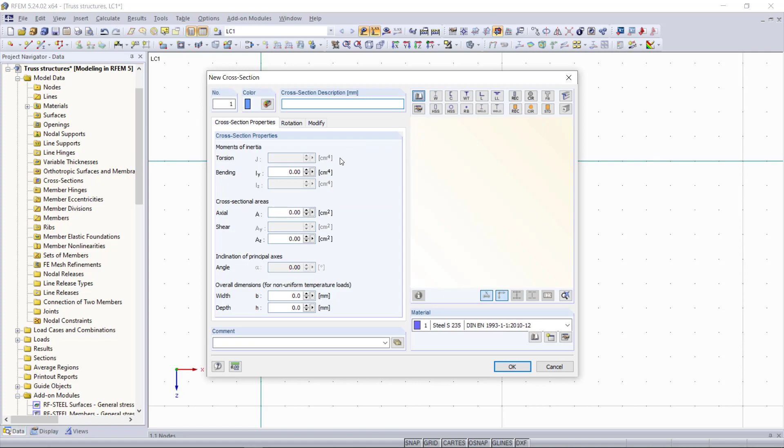So we will begin with modeling the first truss with individual members graphically. The first step will be defining a new cross-section and material. Let's say we choose this time an IPE 80 and as material steel S235. Then, as usual, we will set a new member and start modeling our truss graphically.

So before we do that, I'd like to have a look at the member type to explain how a truss member is defined in our programs, RFEM and RSTAB. In one of our previous tutorials, I've shortly explained it. So until now, we mostly used the beam as member type, which transfers all internal forces. It's a fully fixed member without any member hinges, and this is still what we need for the upper and lower chords of our truss.

Then we have several other options for member types, and we can find a truss here. A truss is defined as a beam member, but with automatically applied moment releases. So a truss is a beam with member hinges on its member ends. And this is great for all of the internal members within our truss, like the diagonals, because we don't have to define member hinges manually on each member end anymore.

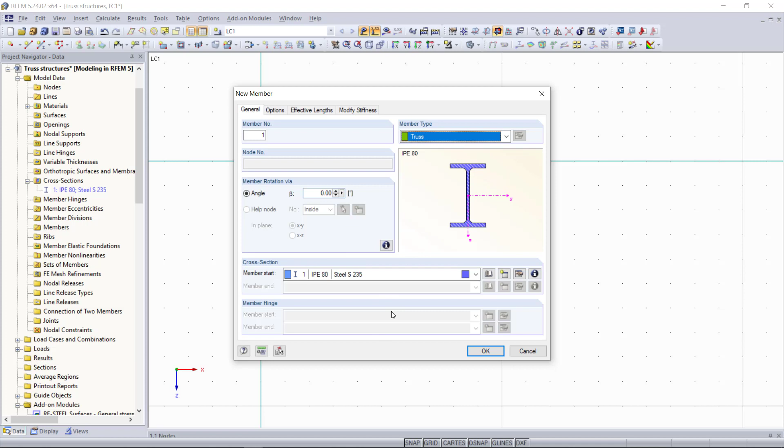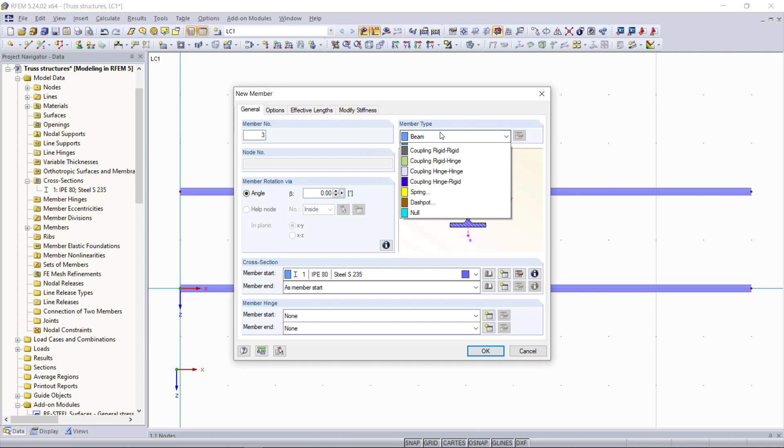But first, we will begin with the upper and lower chords with the standard beam member. So our truss will have a total length of 6 meters and a height of 1 meter. And now for all the remaining members, including the diagonals, we will select new single member up here again, and then we change the member type to a truss member. We will insert in total 6 diagonals, beginning in the middle with a distance of 1 meter in between. First this side and then the other side.

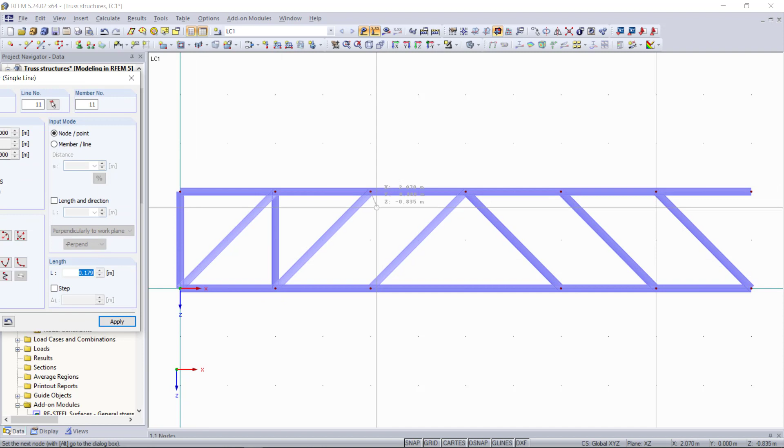Once done, next we need our 2 supports. We will have a hinged one at the start point, and the one at the end will be able to slide along the X direction. Now, as we can see, our truss structure is finished, and we can start with our second example, which will be generating a truss automatically using the model generator.

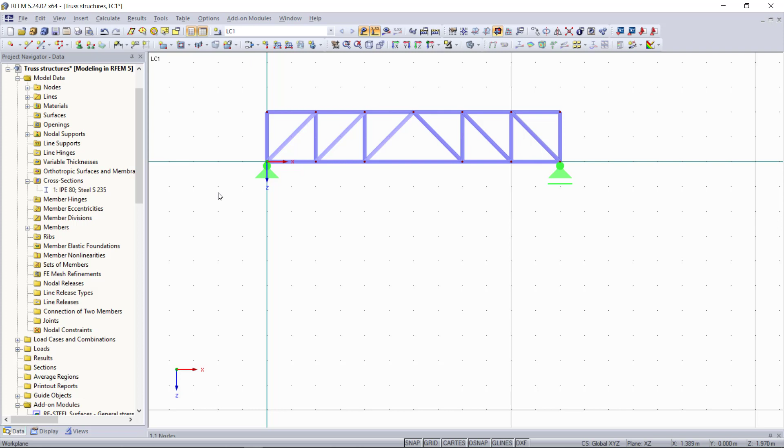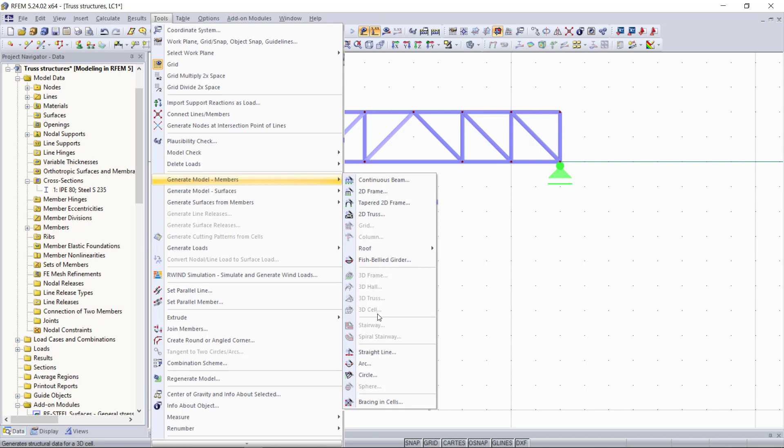First, we will create a new node, and this node will be the starting node of the truss later. Then, in order to generate any structure, we can go up here to Tools, and then we can find Generate Model Members. We can see that some of them are grayed out. This is because we are still in a 2D environment. That doesn't matter for our example, because we will choose the option 2D truss here.

Next, this dialog appears, and in this dialog we can select different truss types, we can set different directions for the diagonals, and then we can define the geometry and cross-sections, member types, materials, and so on. So for our truss, we will choose the first truss type as an example. For the diagonals, we will choose this one, according to our first example. And then down here we can see the final truss structure.

In the parameters, we can set the geometry of the truss. For the number of bays, we can type in 6. The total length will be, let's say again, 6 meters, and the total height will be 2 meters. The side height will be 1 meter. Then we can determine the cross-section and member type. And we can see here the program automatically suggests the member type. That's very helpful. For the upper and lower chords, a beam member is defined, and for the diagonals and verticals, truss members are set by default.

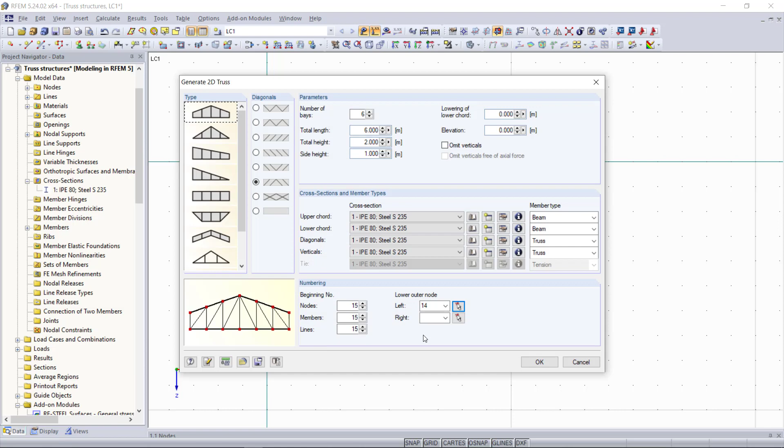Since we only have one cross-section type, the defined cross-section is also set here automatically. And of course, we could simply change this by opening up the library or creating a new one. But for this example, we will stay with the cross-section that we also have for our first truss. Then we will choose the node where the first point of the truss will start. And now we can see the generated truss structure also in the graphical area.

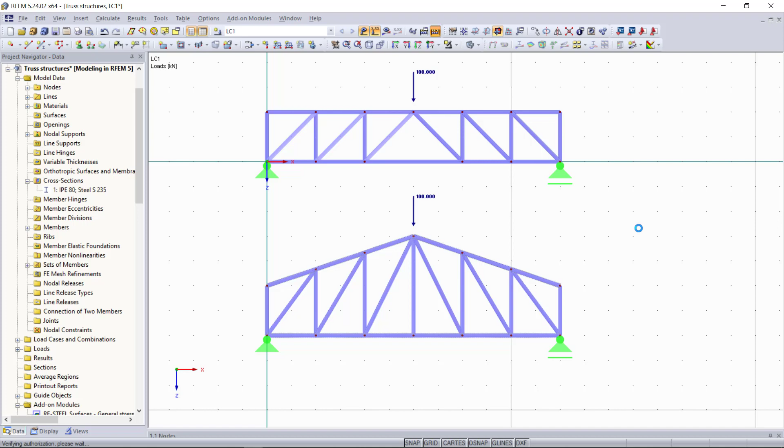Next, we will apply a point load of 100 kilonewtons in the middle of both truss structures. By clicking Calculate All, our results will be displayed, as we can see now.